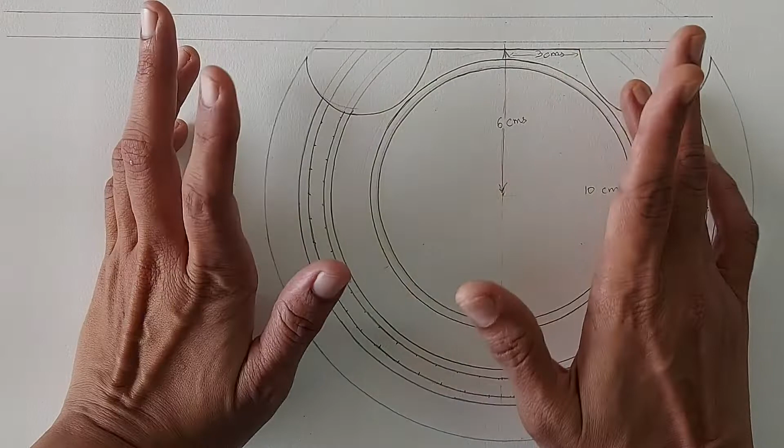Now that we have practiced design drawing, we can try out our imagination on different shapes of things that we use in our day-to-day life. Today we will see how to draw a hand fan and beautify it with design drawing. I will quickly brief on how to draw this base shape.

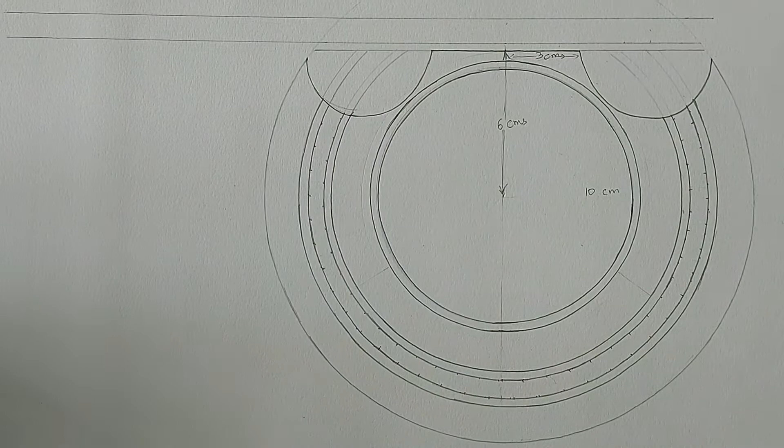First we have to draw this outer circle that is of 10 cm radius. However, this depends on the size of your paper. Now this is the center of the circle.

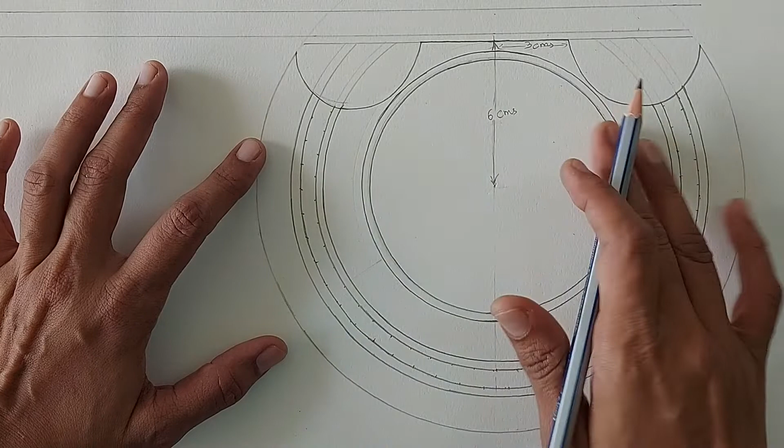I have cut this circle from 6 cm from the center with a horizontal line and have given this shape of a hand fan. You may draw the inner circles or make partitions inside this as per your frame of designs. And then here I have drawn two parallel lines with width of 1 cm to make the holder. You may take the screenshot of this picture as a reference.

I am marking the center here and will start drawing from this point on both ways. This will give an even look to the design.

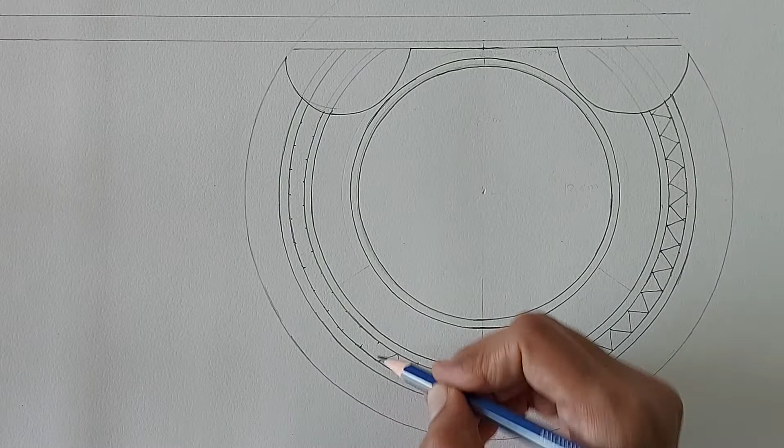Now here I am drawing a freehand design. You may also divide this into 4 or more parts and do some symmetrical drawing.